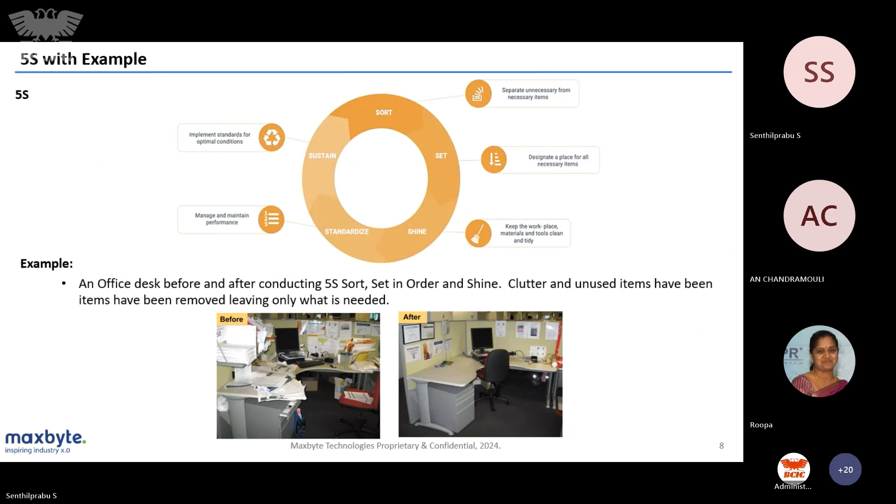Mr. Senthil Prabhu, sorry to disturb, your presentation is not visible. I think it has stopped. You need to share the screen, I think. No, the screen is already shared. Now it's visible, you can opt for the presentation mode. Okay. Is it clear now? Yes, yes sir, it's clear. Please go ahead sir. Okay.

Getting into the lean manufacturing framework, what we call TPS basically. We start with stability, it's a house of 5 elements: stability, standardization, just-in-time, Jidoka, and involvement. The base is called stability, on which the 3 major framework elements of Heijunka, standardized work, and Kaizen are built. On top of that, we have just-in-time, continuous flow, takt time, pull system, and flexible workforce, supported by Jidoka: separate machine and man work, abnormality identification, Poka-yoke, and visual control, which involves the people to achieve the goals of high quality, low cost, and shortest lead time.

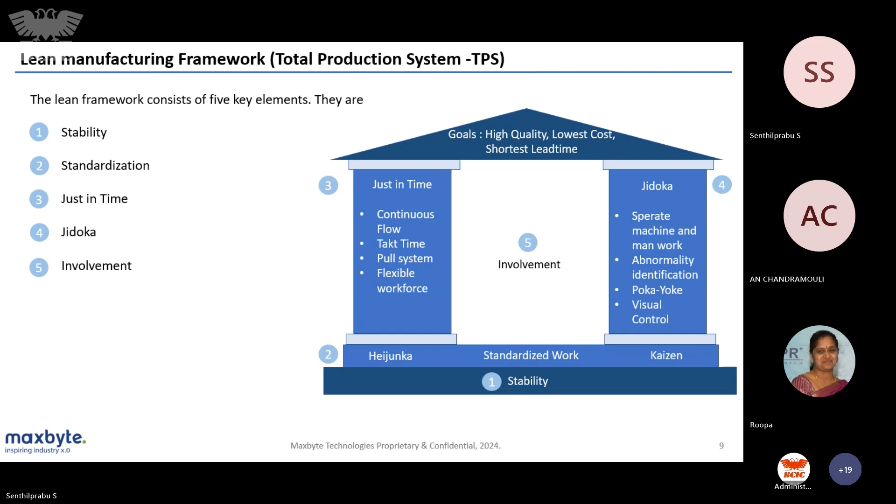Coming to an overview of Industry 4.0 technologies, as mentioned, the industrial revolution has gone through I 1.0 to I 3.0. Industrial Revolution 1.0 began in the 1850s with the use of steam power and mechanization of production, starting with mechanization of manufacturing using steam and water power engines. I 2.0 came up in the early 1900s with the discovery of electricity and assembly line production, and Industry 2.0 evolved.

Industry 3.0 started in the early 1960s through partial automation using programmable PLCs and computers. Now we are in Industry 4.0, wherein smart factories make autonomous decisions using cyber physical systems, machine learning, big data analytics, and interoperability between systems. Now we are in the I 4.0 era.

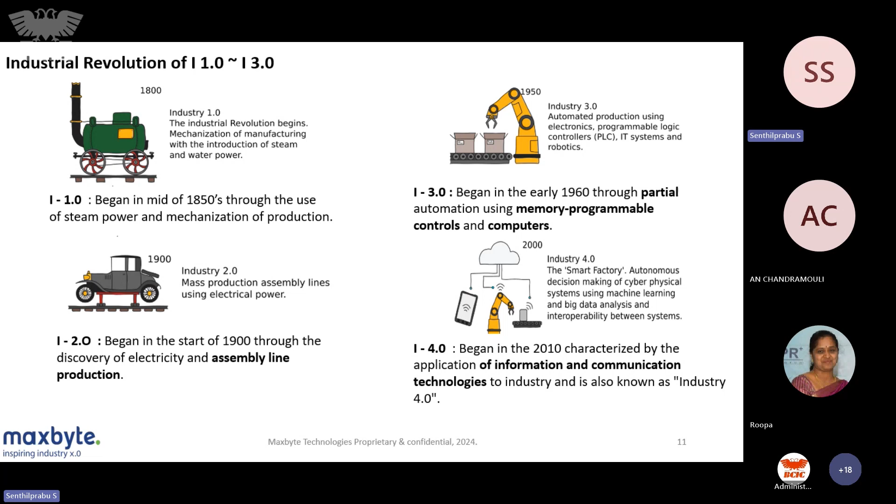What is I 4.0? I 4.0 technologies revolutionize the automation, monitoring, and analysis of supply chains through smart technology, integrating intelligent digital technologies into manufacturing and industrial processes. I 4.0 integrates technologies like industrial IoT, artificial intelligence, big data, robotics, and automation. It facilitates smart manufacturing and development of intelligent factories across the globe. The primary goals are to boost productivity, enhance efficiency and flexibility, and support intelligent decision making and process customization in manufacturing and supply chain processes.

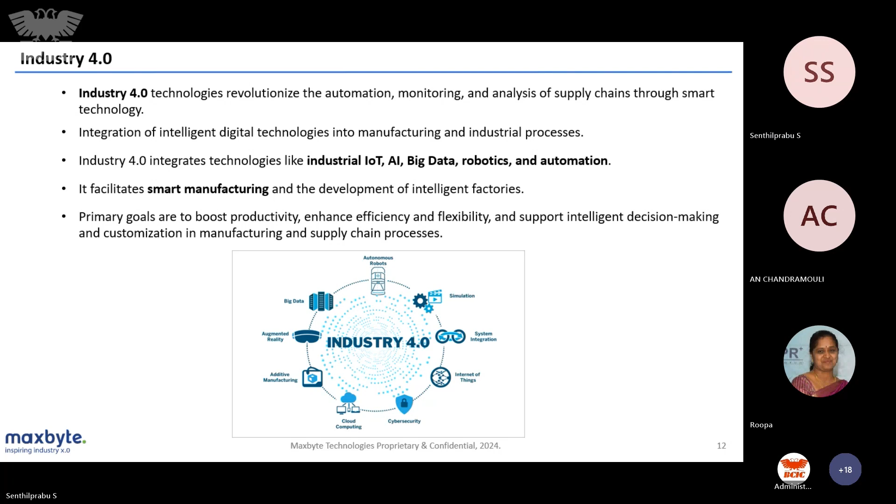The benefits of I 4.0 on lean manufacturing: increased flexibility through I 4.0 helps cope with rising complexity. Moreover, I 4.0 is promising for coping with fluctuating market demand, superior to level production in lean management. The economic production of goods in a lot size of one is a way to enhance production economics beyond traditional economies of scale, meaning we get into single piece flow rather than batch production or mass production flow.

So how do we integrate lean with Industry 4.0 technologies? Industry 4.0 technologies revolutionize the automation, monitoring, and analysis of supply chains through smart technology. We have various domains of I 4.0 technologies on lean: big data and AI analytics, horizontal and vertical integration, cloud computing, augmented reality, industrial Internet of Things (IIOT), additive manufacturing, autonomous robots, simulation and digital twins, and cybersecurity.

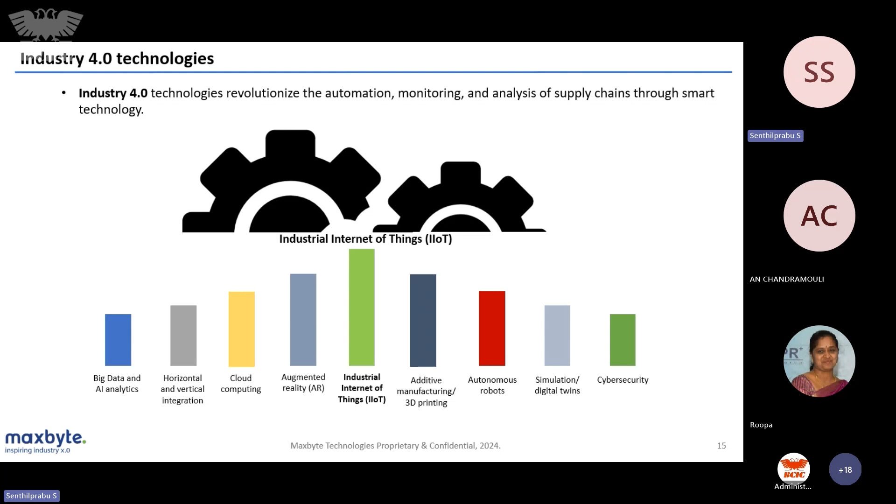Let's get into the basics of big data analytics. So what is big data and analytics?

So when we connect the machines digitally, this is the current approach by means of tagging and other end devices. So we have lots and lots of data collected on an everyday basis.

With tons of data, we need to make a data-driven approach. For example, if a machine is connected to digital IoT, we can monitor the machine's OEE through the machine spindle start and stop, which gives us the availability part of OEE.

With data-driven decision making, big data analytics processes vast amounts of data to uncover patterns and trends, allowing for more informed decision making and continuous improvements. Based on those aspects, we can do a root cause analysis, wherein analytical tools are crucial for performing deeper root cause analysis. This will identify and eliminate sources of waste and inefficiencies.

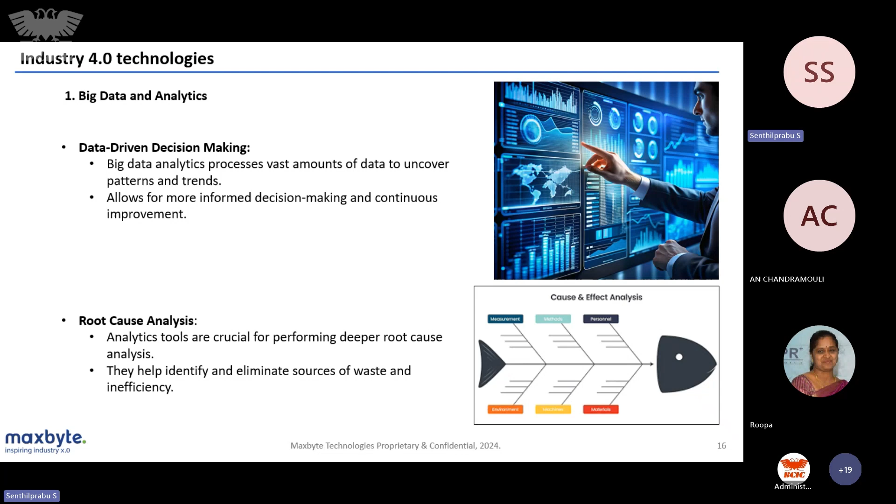So what are the lean tools used in big data analytics? We use value stream mapping, document and knowledge sharing, batch processing versus stream processing, data cleaning and preparation, data collection optimization, feedback loops, agile analytics, collaborative tools, automated reporting, performance monitoring, continuous improvement, and scalable data storage solutions.

These are tools used in big data, and the benefits we get are increased efficiency, improved data quality, faster decision making, reduced cost savings, enhanced collaboration, continuous improvement, scalability, greater agility, reduced bottlenecks, and higher ROI on data investments.

Getting back to horizontal and vertical integration, the focus is on connecting across systems across the supply chain between external partners. Vertical integration is connecting systems within the same organization, between production and business operations.

For example, when you want to identify within the systems, within the company, how a product flows across the company through the value stream, that's vertical integration. And how the supply chain flows from the supplier to the customer, that's called horizontal integration.

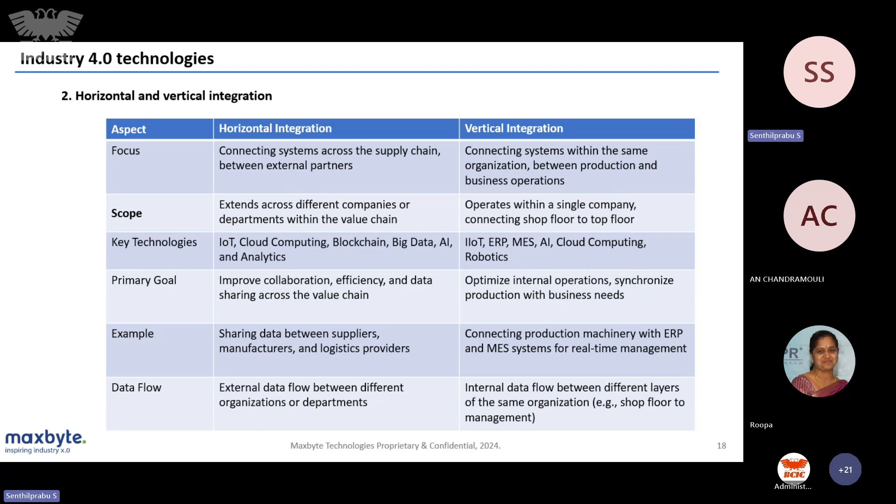The key technologies used are IoT, cloud computing, blockchain, big data, AI, and analytics. The primary goal is to improve collaboration, efficiency, and data sharing across the value chain, so information is available across the team to take decisions strongly, and data flows externally between different organizations or departments.

Right now, cloud computing is the talk of the place everywhere. We don't have separate servers or individual infrastructure developed at each plant. We all go for cloud computing because of the scalability and collaboration.

Cloud-based solutions offer scalable storage and computing power for lean operations. Cloud platforms integrate systems and data for a holistic view and lean operations.

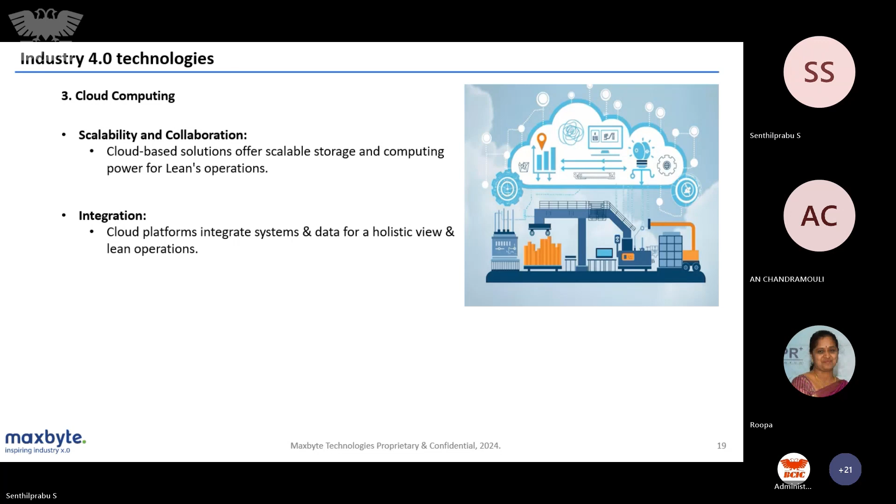In cloud computing, we use value stream mapping, continuous integration, continuous deployment, just-in-time provisioning, 5S, Kanban, root cause analysis, TPM which is total productive maintenance, agile methodology and Scrum in cloud environments, cloud automation, Lean Six Sigma in cloud computing, and performance metrics and KPIs.

We have a lot of benefits out of Lean 4.0 in cloud computing as well, which are continuous improvement, innovation, flexibility in resource allocation, reduced environmental impact, enhanced customer experience, streamlined supply chain management, improved resource utilization, enhanced security and risk management, data-driven decision making, and streamlining operations and process automation.

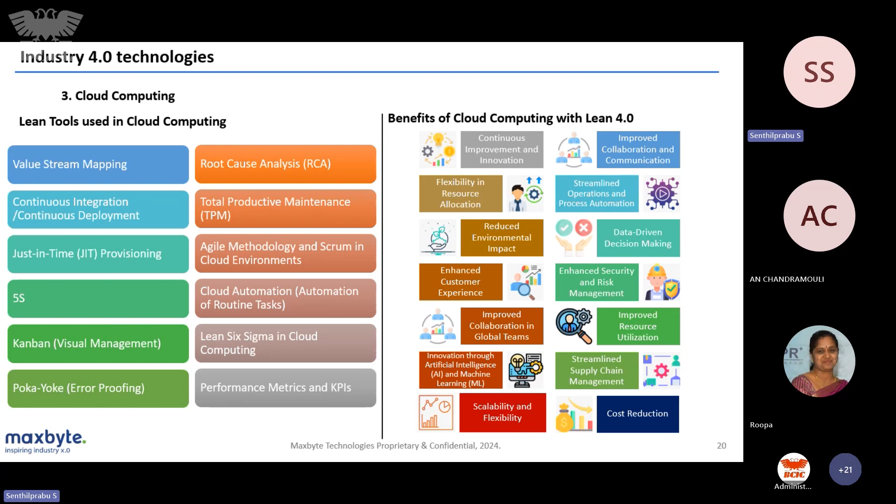Now we have augmented reality and virtual reality, wherein people are given a device like a goggle to understand how a work instruction can be taught. You can see what is happening, and now all the people are getting into AR and VR for training employees and simulating the production process in a virtual environment.

Earlier in traditional manufacturing, we were having on-job training for people to learn and upskill on their job. Right now those days have gone. Now we have come with AR, augmented reality, and VR, virtual reality, wherein people can see and do it themselves on how to handle the on-job training itself.

It also supports real-time assistance of worker tasks with real-time instructions. The time taken for the training period is reduced, and the people can get to production faster.

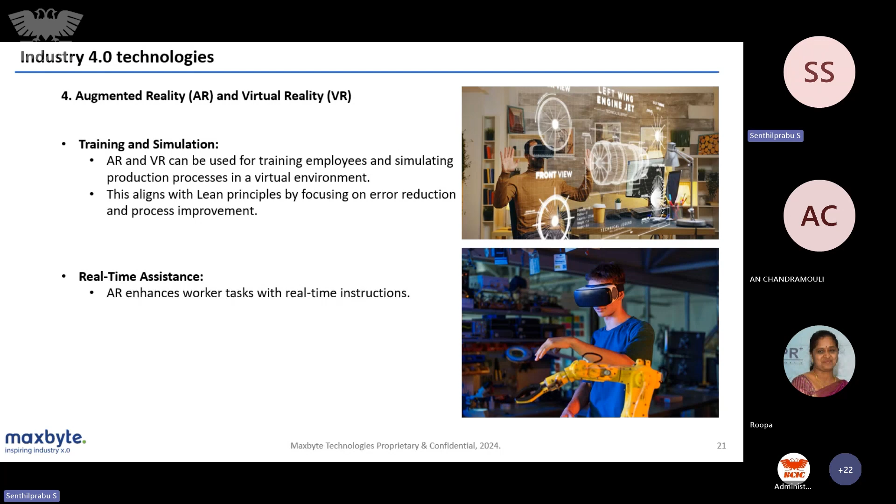We use AR, VR on standardized work, 5S, Kanban, TPM, visual management, and simulation process optimization. We also use them on value stream mapping, just-in-time, root cause analysis, continuous improvement, and cellular manufacturing.

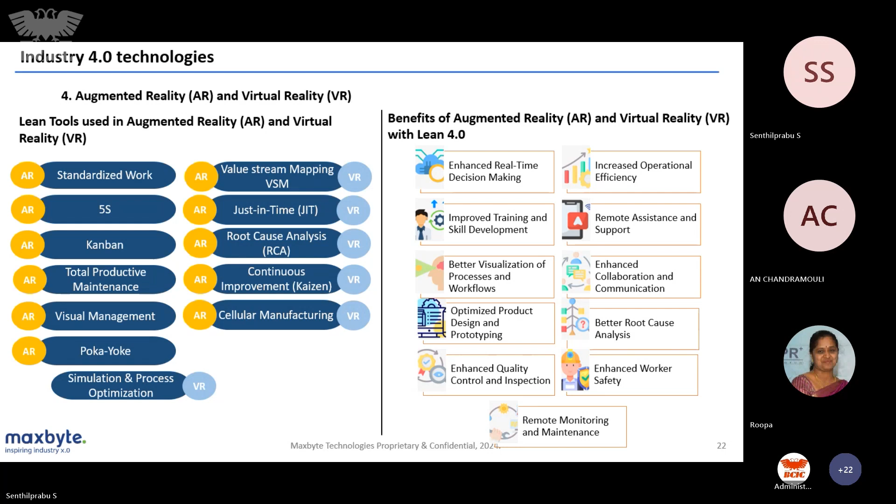So getting into IoT, Internet of Things. It supports enhanced visibility and monitoring.

IoT devices offer real-time data on equipment performance. They provide insights into the production process and help monitor supply chain activities. This technology is increasingly essential in today's professional environment. Real-time visibility identifies inefficiencies, predicts maintenance needs, and monitors key performance indicators.

For example, if a machine breaks down today, earlier there was a manual reporting system. The production person would call a maintenance guy, who would report to maintenance, and the maintenance team had to come and check the issue on the machine.

Now with IoT, the machines are connected digitally everywhere. When the spindle stops or the machine creates an alarm, the maintenance team automatically gets a pop-up, and a ticket is automatically raised saying the machine has a problem and needs to be closed on top priority. We can also fix an escalation matrix so that if the machine is stopped for 30 minutes, it stays within the control of maintenance.

Every 30 minutes, this can be escalated to the hierarchy above top management, so that management also gets involved on critical or bottleneck machines, ensuring production is not stopped and immediate decisions are taken. That's how they reduce inefficiency in the system.

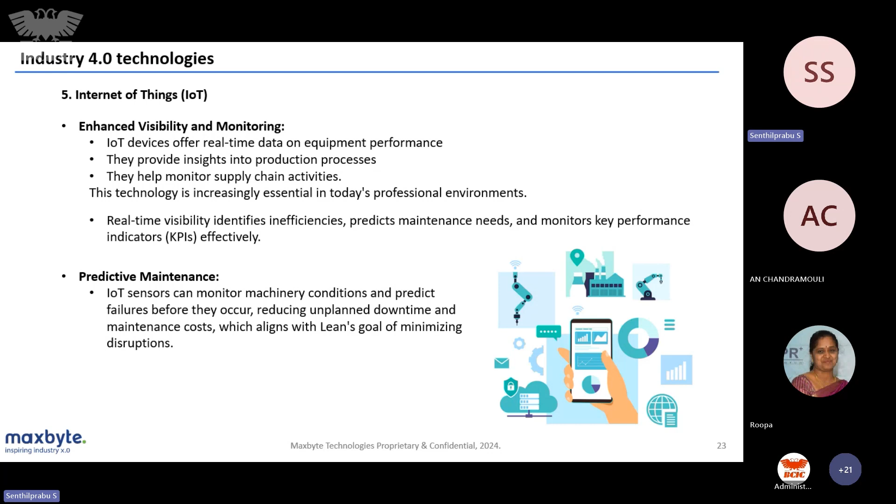This happens in a pattern way, wherein all the equipment or sub-elements of the machines are monitored through artificial intelligence or predictive analytics, so that we don't have downtime or react only after the machine has failed. Now we know that at 70, 80, or 90% of the life of the equipment or sub-element, we replace them in a planned way so that downtimes are completely avoided and there are no major delivery failures.

This is one of our dashboards developed for one of our customers. Industrial IoT and lean processes are combined with advanced analytics in a data analytics methodology that uses predictive modeling, machine learning algorithms, deep learning, business process automation, and other statistical methods to analyze business information from various data sources.

Here we have the refrigerant dryer as one of the equipment being monitored, and we track operational efficiency and component health. Right now they are at 100%, and we also have data for air temperature inlet and outlet, which is continuously monitored. The people sitting across the dashboards understand the health of the machine and its operating parameters.

So we need not go there and check each and every machine's efficiency or performance ourselves. Our digital system automatically ensures that all parameters are monitored, and the machine's health and efficiency is maintained across the tables.

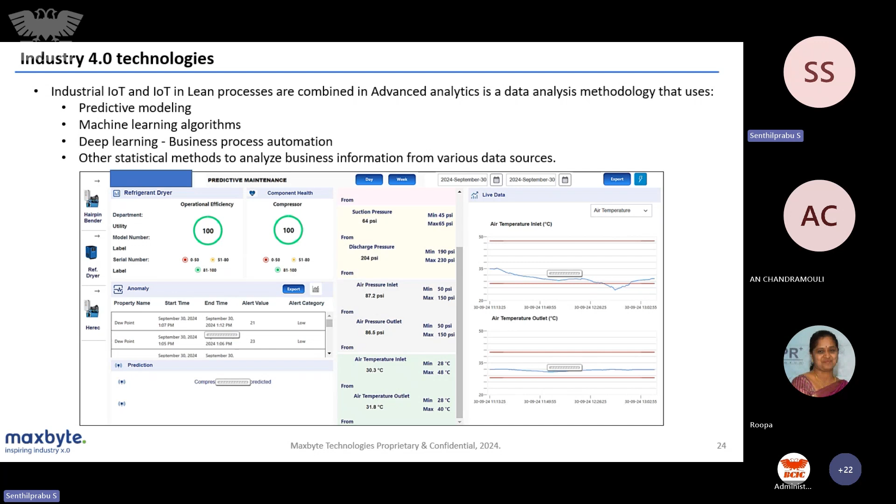Advanced manufacturing technology involves additive manufacturing. Currently, the concepts of casting and machining are going out, and it's increasing with 3D printing, enabling rapid prototyping and customization, reducing lead times and waste. Material waste has been reduced now.

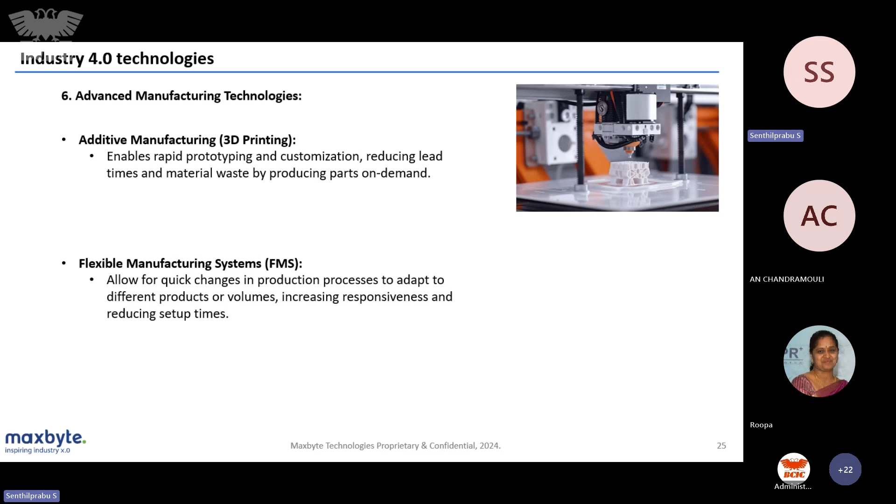So what we call build-to-part: a flexible manufacturing system allows for quick changes in the production process to adapt to different products or volumes, increasing responsiveness and reducing setup times.

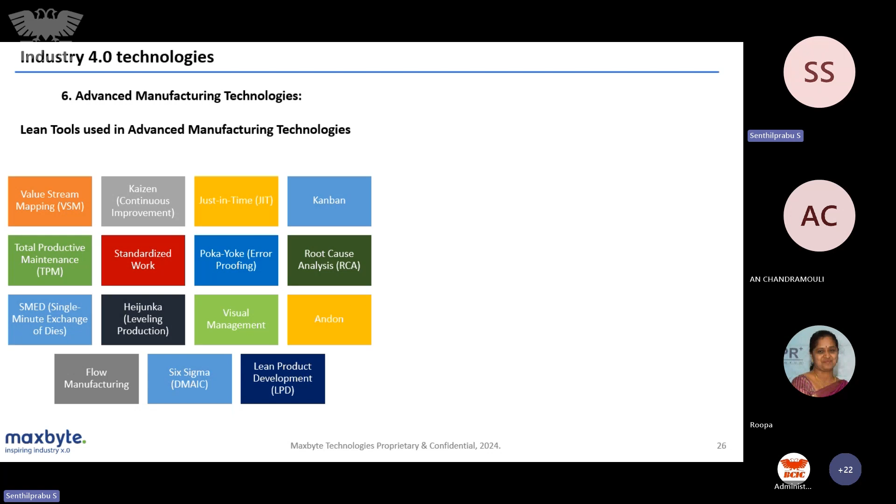Right now in Industry 4.0, we have also aligned with advanced robotics to bring in flexible automation, wherein collaborative robots and cobots with advanced robotics handle repetitive or hazardous tasks with accuracy. This frees up manual human workers to focus on more value-added activities, increases overall productivity, and supports lean emphasis on maximizing value.

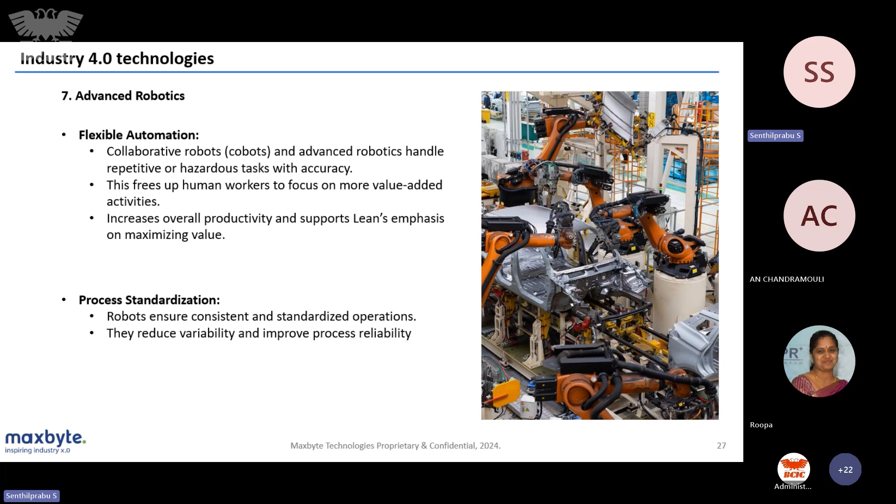And process standardization, what we call a robot, basically works to ensure consistent and standardized operations. This reduces variability and improves process reliability.

These are various lean tools used in advanced robotics as well.

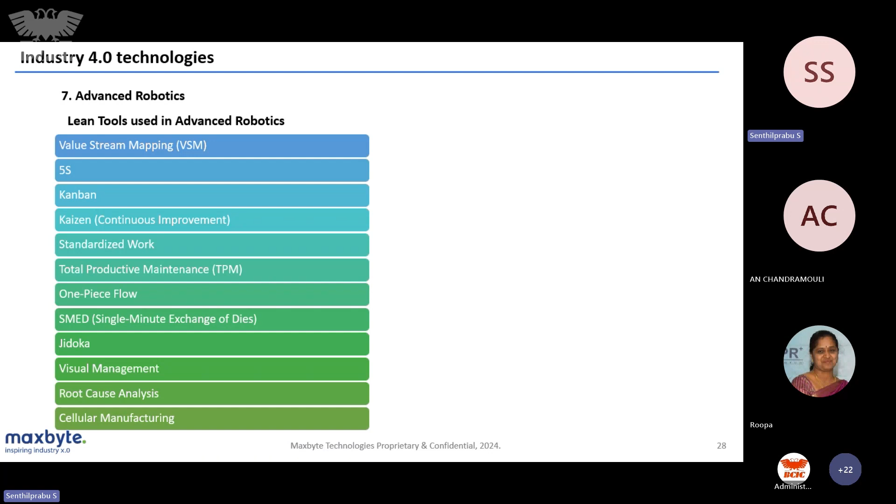This is one of the Industry 4.0 technologies called robotic process automation, where automating repetitive and manual tasks reduces human error, speeds up the process, and frees up employees to focus on more valuable activities.

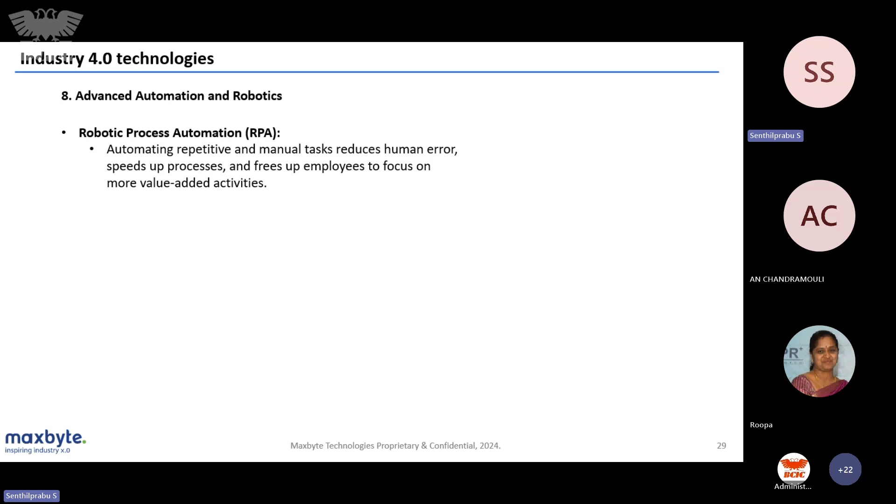We often use collaborative robots to work along with humans, handling tasks that are ergonomically challenging or require precision. These are semi-automatic, working collaborative robots that work alongside humans and support them in challenging environments, improving both safety and productivity.

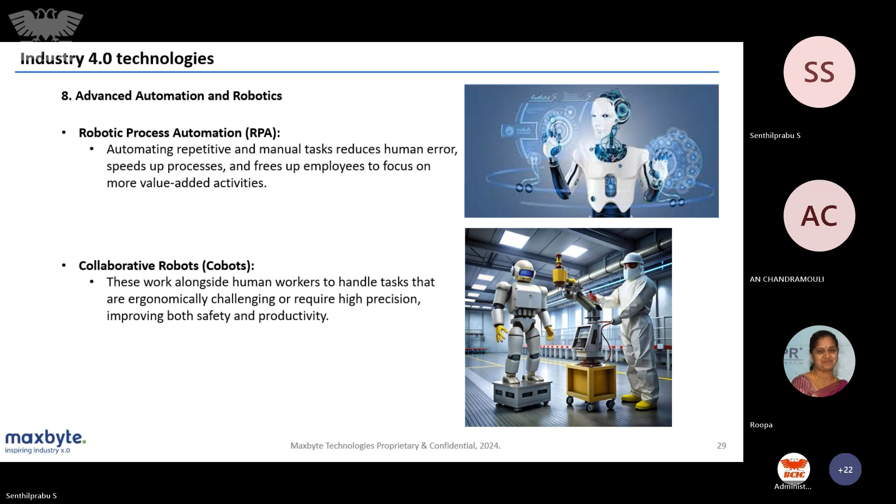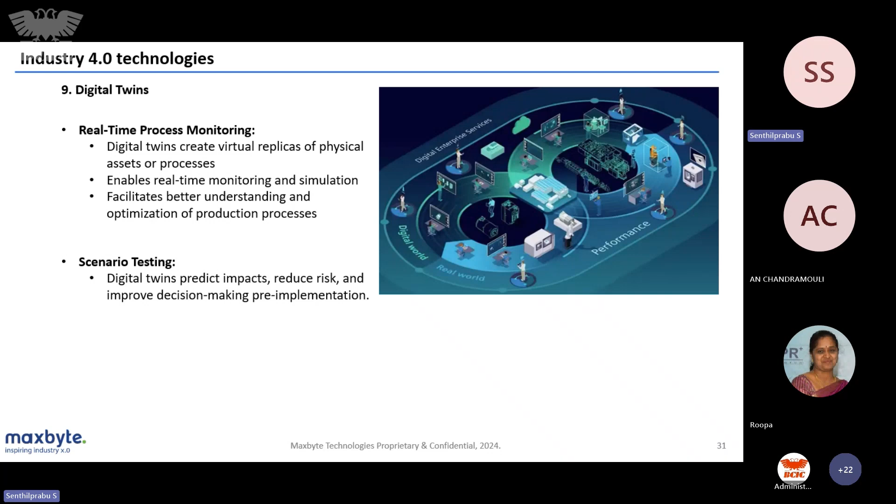Right now we bring out with digital twins the concept of creating virtual replicas of physical assets or a process based on real-time monitoring. This enables real-time monitoring and simulations, facilitates better understanding and optimization of production process. Normally the scenarios testing digital twins are used to predict impacts, reduce risk, and improve decision making before pre-implementation.

So it's one of the digital twins implemented in one of our customer places, wherein you can see the movement of the material, and you can also understand the OEE or real OEE of the machines at real time. It clearly indicates what materials are on the line, what could cause a stoppage, and what is the real OEE at the plant level.

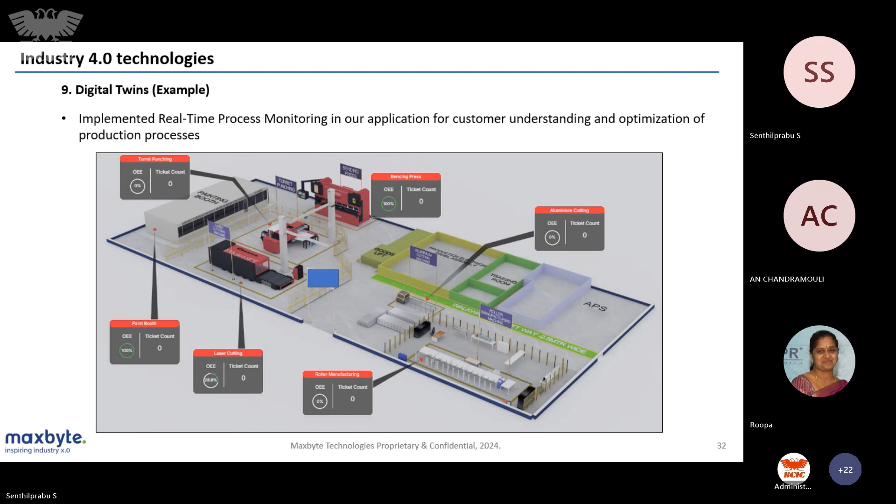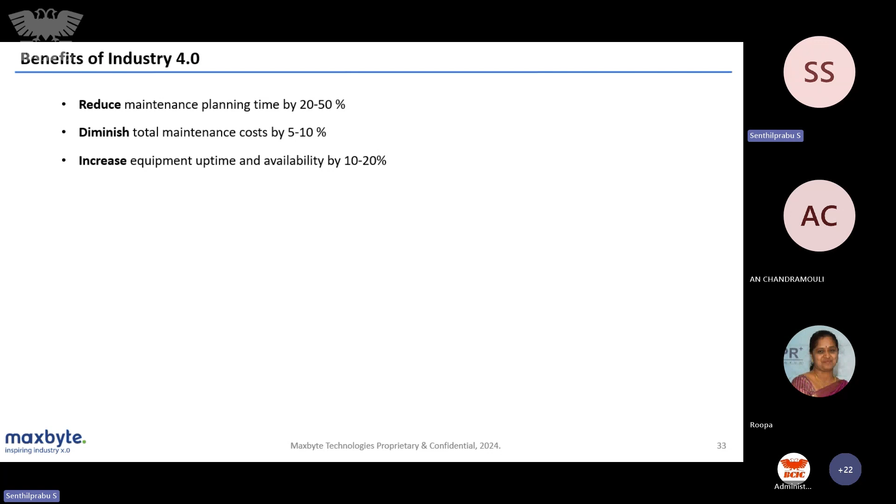The benefits of Industry 4.0 OS on the manufacturing background is reduced maintenance planning down by 20 to 50%, diminished total maintenance cost by 5 to 10%, and increased equipment uptime and availability by 10 to 20%.

So we have a lot of applications there. We are into automotive, production and inventory management. We also are into aerospace, engine overhaul, and spare parts management. We are into process industry on metals management and assets management.

We have a lot of common issues, which include throughput time, equipment downtime, rework and reinspection, and inventory cost. In the aerospace industry, we have turnaround time and obsolescence cost.

On process, we have metal wastage and equipment availability, which we have provided solutions for with one-piece flow and pull system, improving equipment reliability and elimination of defects and inventory optimization. Also on process streamlining, standard operating procedures and spare parts management, we have supported with the elimination of defects and reduction of unplanned downtime.

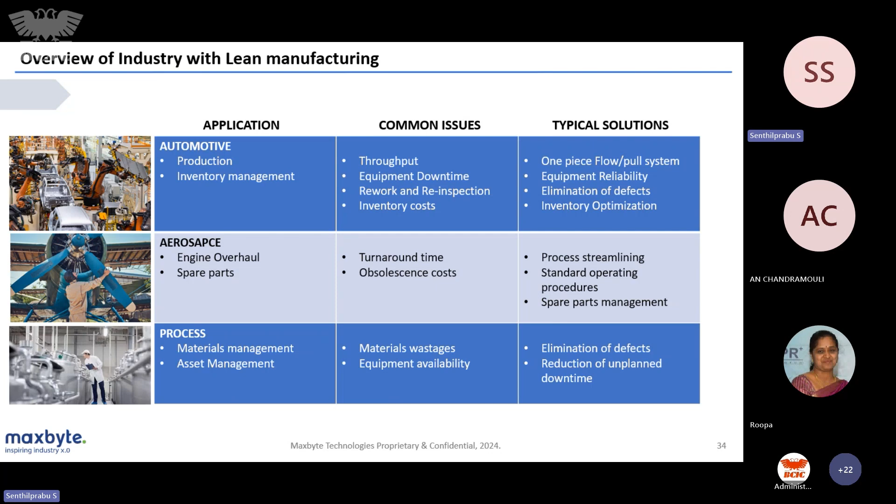So we have a few companies whom we are working with on the implementation of lean concepts. In Toyota, Bangalore, we have supported Toyota on implementing Lean 4.0 with big data analytics in manufacturing facilities.

We have utilized real-time data from connected machines, allowing monitoring of equipment health and worker efficiency. This supports us in meeting increasing customer demand for high quality vehicles while improving the company's efficiency and cost effectiveness.

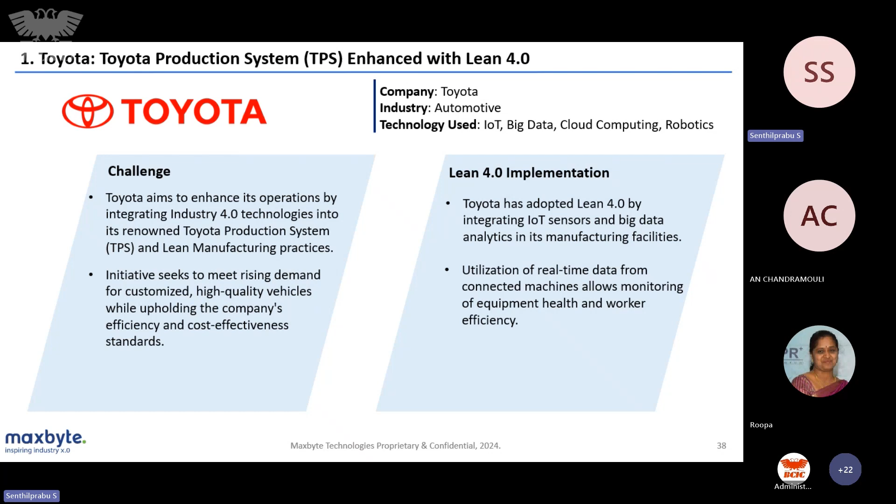So these are the connections what we've done. IoT sensors have been installed on all machines and production lines, monitoring performance metrics such as efficiency, quality, and productivity. Real-time data is transmitted to a central cloud platform for analysis and decision making. With big data analysis, we analyze data to identify patterns and optimize machine scheduling, predict potential failures, enhance operational efficiencies, streamline operations, and reduce waste through improved forecasting and scheduling.

And we use robotics to decrease manual labor, and it also supported improving precision in tasks, and it has resulted in improved quality, consistency, and reduced defects.

The results we have achieved: 20% reduction in lead time by improving workflows and utilizing real-time data to manage production, and enhanced machine uptime through predictive maintenance, reducing unplanned downtime by 20%. This enables more optimized customized production through flexible management systems, allowing Toyota to meet changing customer needs more efficiently.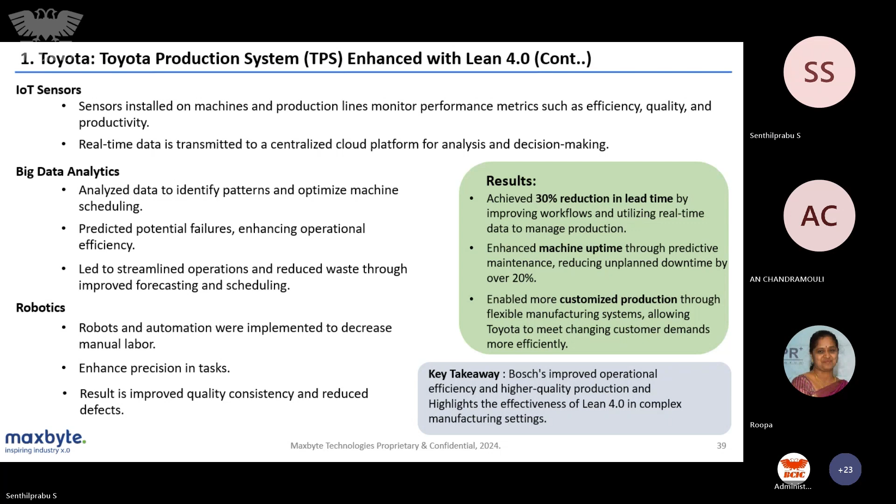We have also supported Bosch. Bosch was encountering difficulties in overseeing production processes in its global manufacturing plants. Because of a rise in customer demand and a complex supply chain, Bosch was prompted to improve its operations. This enhanced operation was crucial for Bosch to stay competitive and uphold high quality standards.

With Lean 4.0 implementation, Bosch was able to get all the machines on IIoT and they utilized machine learning algorithms and cloud-based analytics to enhance the manufacturing process. We also incorporated augmented reality in quality control and assembly.

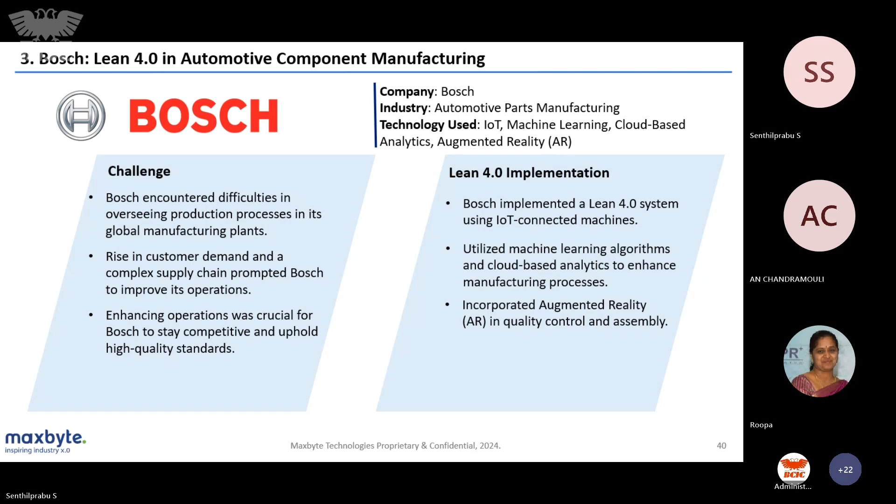So here also Bosch deployed IoT sensors to monitor equipment performance, track inventory levels, and control the entire manufacturing process in real time. They supported this with artificial intelligence-based machine learning. Data from machines were utilized to train machine learning models. Models predicted failures and optimized production schedules, ensuring high quality output by adjusting parameters in the manufacturing process.

They also integrated all the data into cloud analytics, wherein Bosch implemented cloud-based analytics to consolidate data from various locations. This is called enterprise level planning, wherein data from different plants is combined and collectively analyzed for better performance. This allowed for monitoring of machine and production line performance, enhancing efficiency tracking and pinpointing improvement opportunities within the facilities.

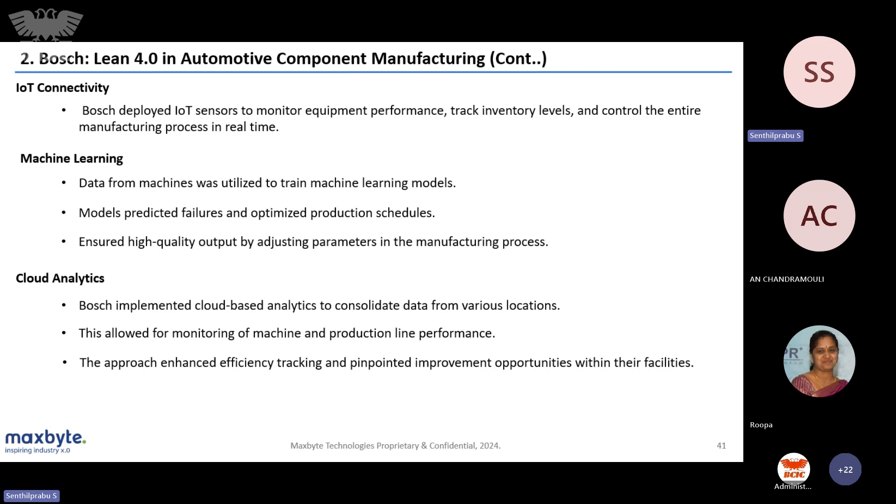And they also have gone with augmented reality. AR glasses enhance assembly work by providing real-time visualization of assembly instructions and quality standards. This technology ensures precise adherence to work steps, significantly reducing the likelihood of defects and also improving safety.

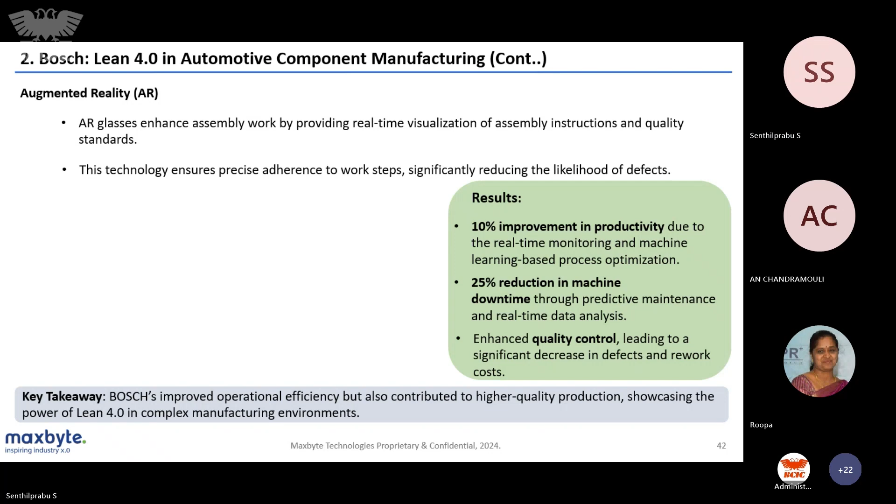One of our GE aerospace and defense industry examples: GE encountered difficulties in aircraft engine manufacturing facilities. The key challenge was to decrease production time for intricate components, and the company aimed to enhance production process accuracy while managing costs effectively.

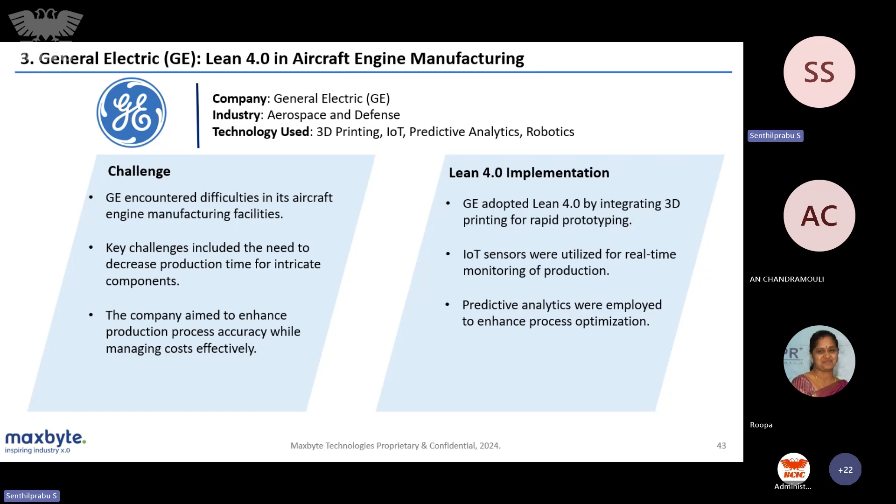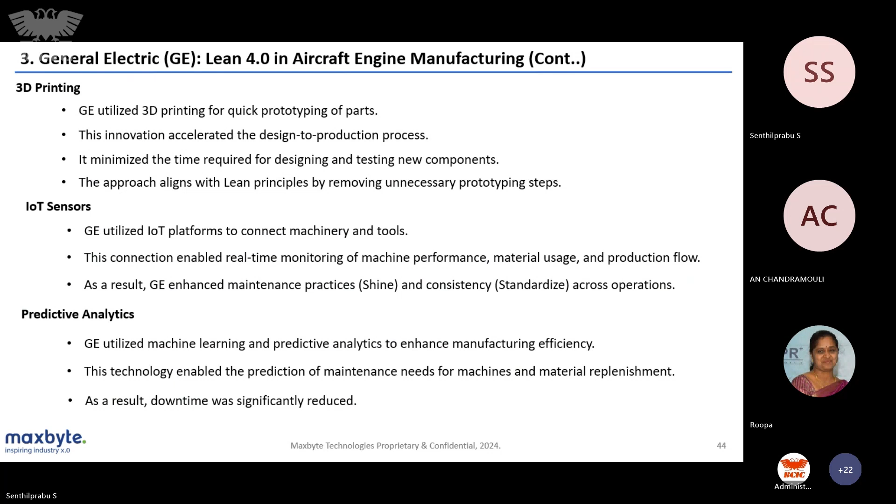Right now they have also integrated robots to automate their repetitive tasks, which decreases human error and increases output with improved consistent quality. Overall, these achievements and advancements contribute positively to sustaining Industry 4.0 in this plant.